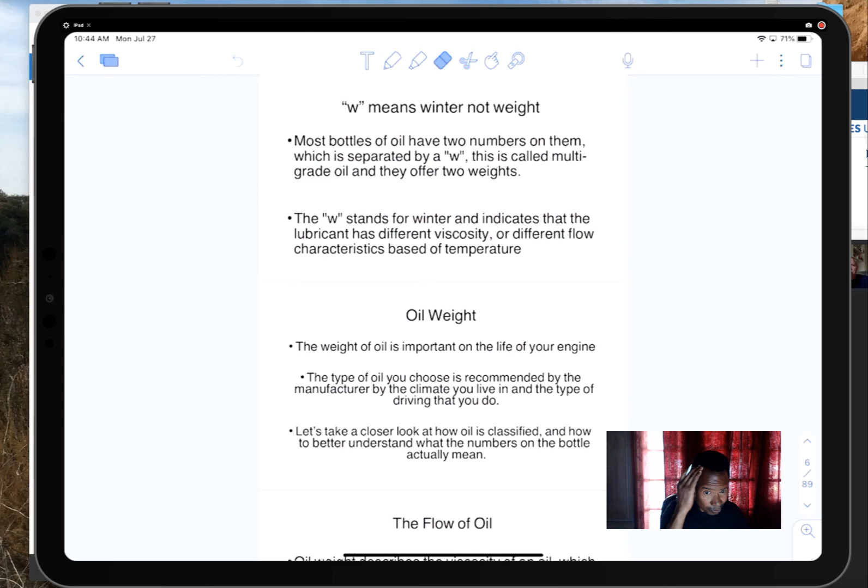All right, there we go. Okay, we talked about last week about the oil change and what's on the bottle. That is very important to know if you're going to buy your oil. Shit. Hold on. Wait a minute, minimize this.

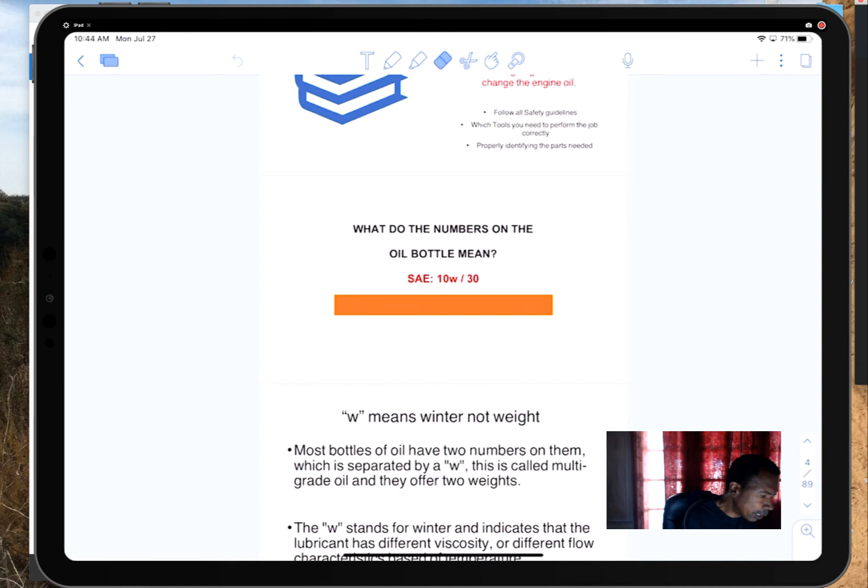Okay, and what we're talking about is this here, this number here. What does that mean? Just share the screen. Oh, I'm not sharing the screen. Yeah, share screen. Damn.

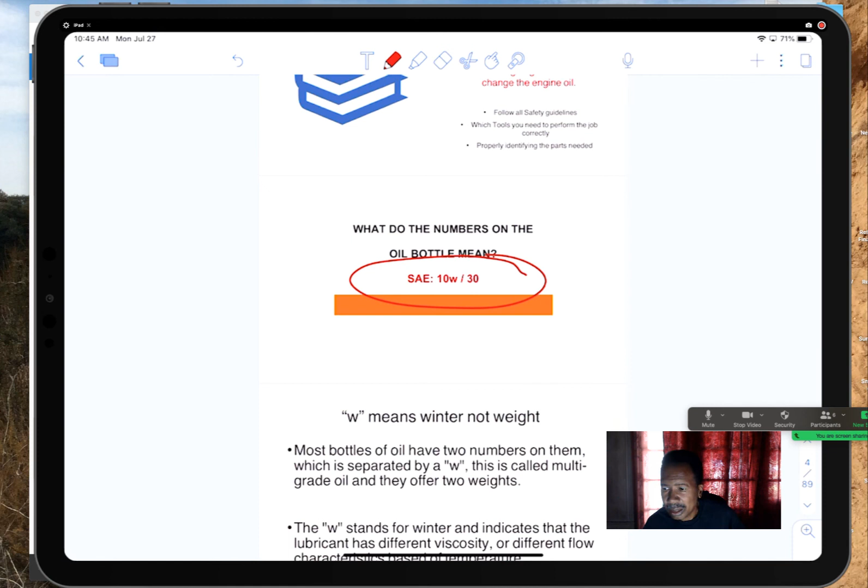All right, again, what I was talking about is when you go buy oil, you see the numbers on the bottle, like SAE 10W30. I used to think that W meant weight, but somebody said last week it means winter. This 10 and this 30 is the flow of the oil, or the thickness of the oil. A 10 weight oil is much thinner than a 30 weight oil, and a 5 weight oil is much thinner than a 10 weight oil.

So that's why it's important to look at that, because the wrong oil can damage the car. I've seen this once when people put the wrong oil in the car, and the next morning the car wouldn't start. They towed it to another shop and figured out somebody put the wrong oil in. The reason is the oil has to flow, and when it's cold it has to be a thinner oil to flow faster. This right here is at operating temperature.

Do you ever buy winter oil in Southern California, Mr. Davis? What's winter oil? Well, it's W, so that's for... No, this is for winter. The W means winter. On this, all oil says this. As far as I know, no matter where you buy it from, summer, winter, fall, California, Texas, Philadelphia, they all say the same thing. They might have an oil that's branded saying 'winter' on the bottle, but the W means winter.

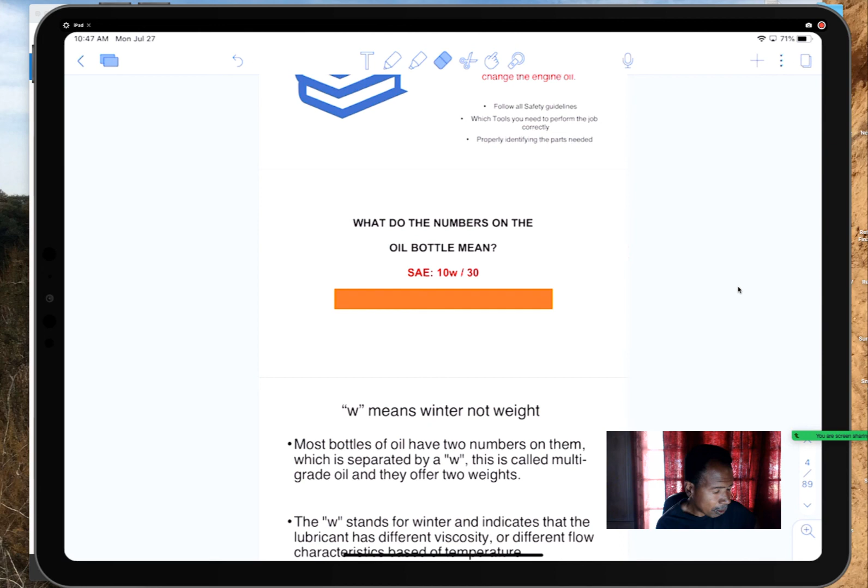In colder weather, the weight's going to be 10, but in normal weather, the weight's 30. Exactly, exactly. And the reason why is because the metal hasn't heated up yet, so you want the oil to flow faster, so you need a thinner oil. But a thin oil on a car at normal operating temperature might be a problem. And too thick of an oil on a cold car can cause an engine knock, engine damage. So the W means winter, not weight. For a long time, I thought it meant weight.

Yes, Mr. Davis, what does it mean when it's synthetic? What's the difference? That's a very good question, that's a really good question. Because oil is just made from, I don't know, I'm gonna say dinosaur bones.

Fossils. Synthetic oil is actually made for cars, believe it or not. Like my Prius and my Sequoia, I use synthetic oil. That's actually made for cars. It's a better way that it flows, a better way it treats the metal. It's actually really made for cars. The other oil, petroleum oil, is just oil. It helps, it's a lubricant in there, but synthetic oil is actually made for cars. It better treats the metal, and it lasts a little longer.

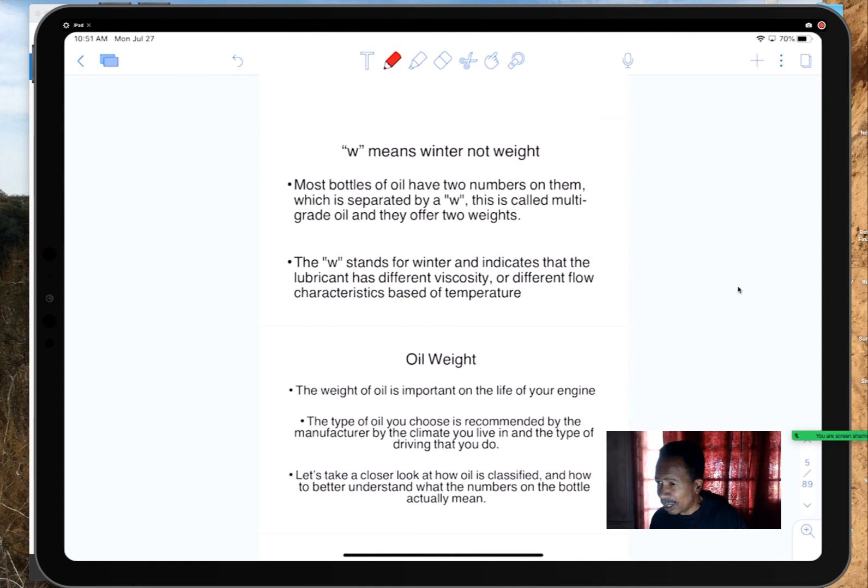Synthetic oil, in theory, as far as I know, was made to treat the metal in cars, expanding, contracting, a lot of mileage on the car, wear and tear. It was made just for that. Okay, does that make any sense? Yeah.

But most newer cars use synthetic oil, right? Like hybrids, they use a lot of it. Some of them use synthetic oil, but always get the oil recommended for that manufacturer. That number is what they recommend for that car. That number and type is made for that car, especially on newer cars. Not saying you can't get aftermarket oil.

Instead of getting Toyota oil, there are aftermarket name brand oils that still work. I can't even think of the names of them. Oh, like Valvoline and the one for... man, I can't even think of the names right now. Like name brand oils. Valvoline, that's one. And what's the name of the other one? Mobil, Valvoline, and...

Pennzoil, thank you. Thank you so much. I couldn't think of the name of that. Pennzoil, there you go.

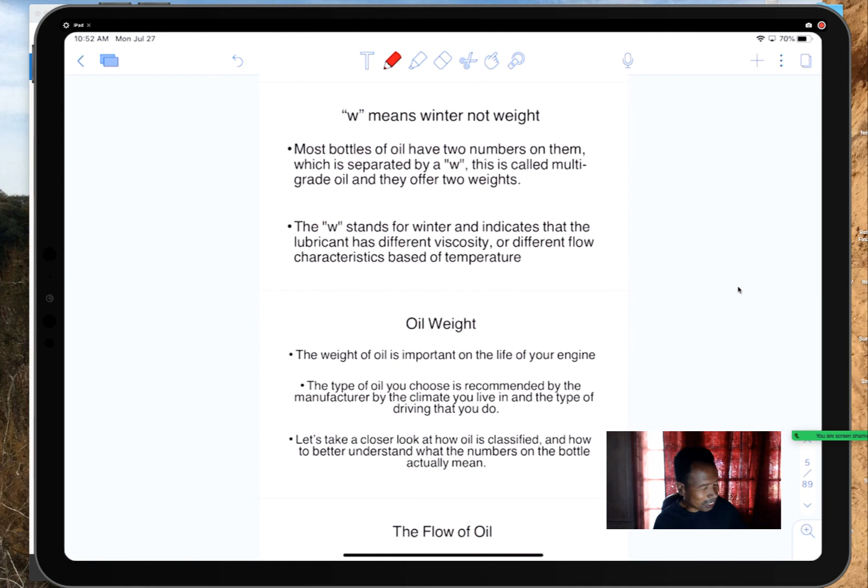But those oils are name brand oils, right? Anything that says SAE or API on it is approved by the Society of Automotive Engineers and American Petroleum Institute. It's supposed to be a decent oil. But if the car says use synthetic, you should use synthetic. I wouldn't go beyond that, if it says use synthetic, I would still stay with synthetic.

And it could be synthetic aftermarket too, it could be Pennzoil, Valvoline, synthetic oil for that car. It doesn't always have to be from the dealership. But if you don't get it from the dealership on a newer car, make sure it's approved oil.

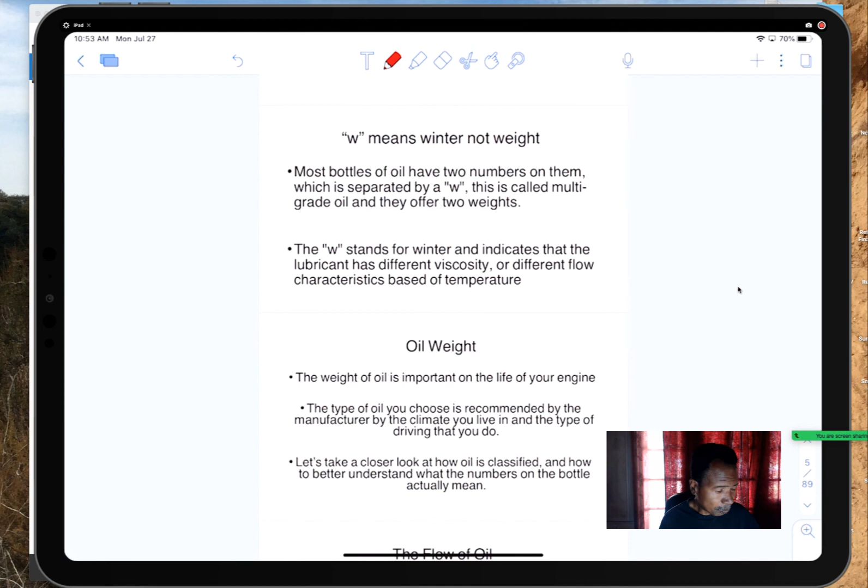Especially if you've got a new car under warranty, that's how they get you too. Say this just happened to one of the body teacher's cars, brand new car. The first year he had it, it started knocking. We literally couldn't believe it was knocking, we thought it was a belt or a pulley. It was the engine knocking.

You know what knocking means, like a little hammer noise. So he had to take it back to the dealership, and he'd been doing his own oil changes. So we got a little nervous there because now he had to go find all his receipts to make sure he used the right oil. Because the first thing they're going to ask is who did the oil change, and did you use the right oil. If they find out you used the wrong oil, your warranty is void.

So even though you use aftermarket oil on a newer car, make sure you keep the receipts, because they'll find any way they can to get out of warranty. So they had to take the engine apart, fix the part, I think it was a cam lobe or something, a valve, I forgot what it was, and put it back under warranty. That means the tech actually worked for half the price.

But if they found out you put the wrong oil in the car causing that knocking noise, that can void your warranty. So on a newer car, make sure you use the approved oil. On a lot of older cars, just use good oil because there's no warranty anyway, it's your car, just make sure you use good oil on it.

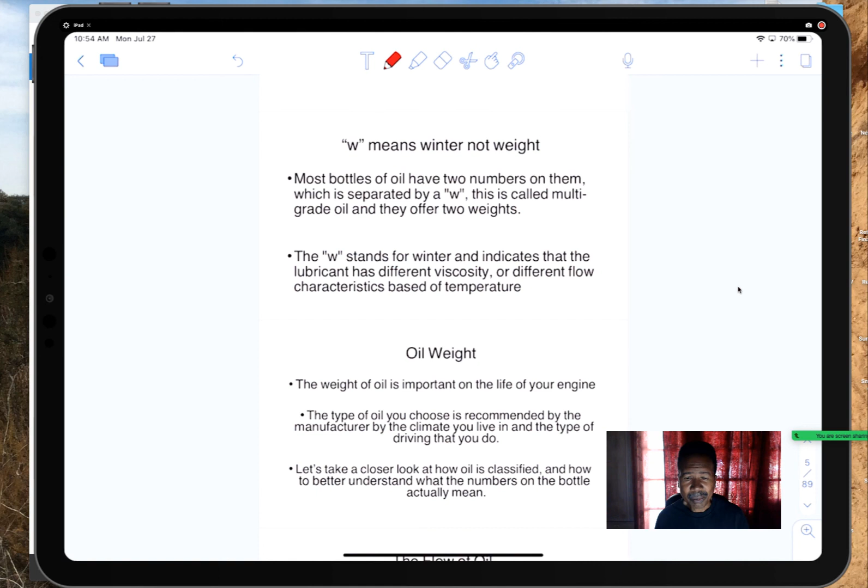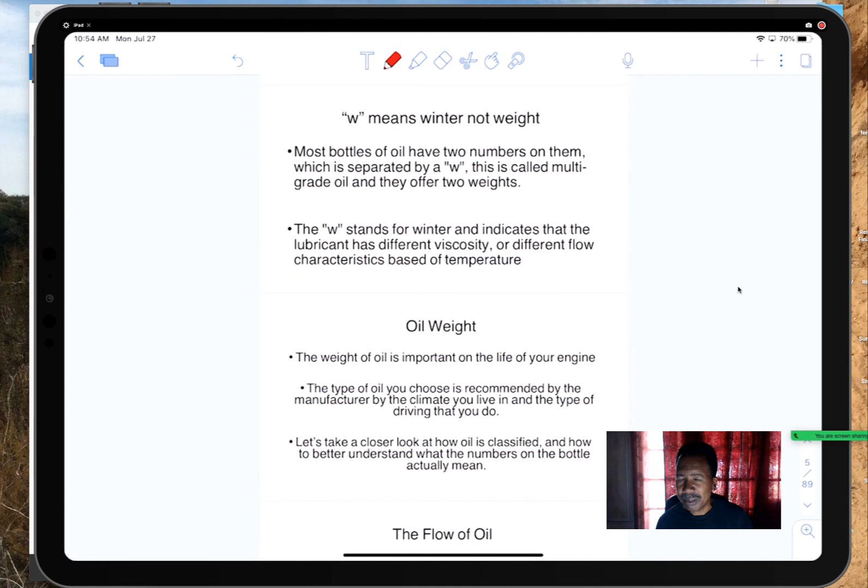So now going back to this. Most bottles of oil have two numbers on them, separated by a W. This is called a multi-grade oil, and they offer two weights.

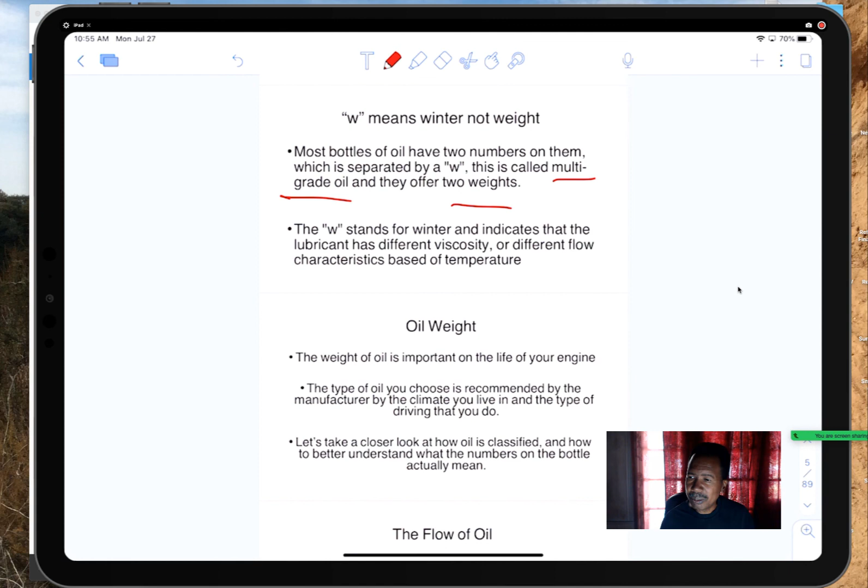The W stands for winter and indicates that the lubricant has different viscosity, which basically means flow characteristics based on temperature. And that's what you want. You never want to use a straight weight oil like 30 weight, where that's all it says is 30 weight. You don't want to do that.

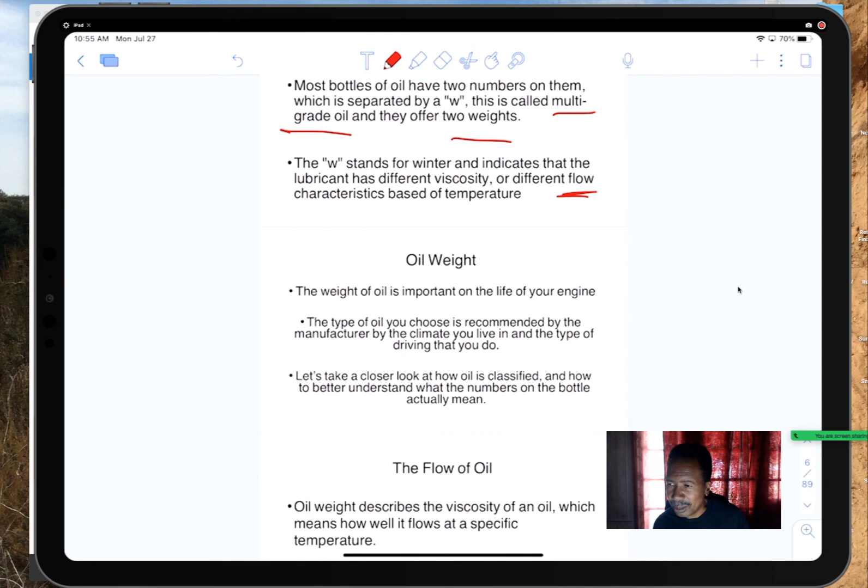Oil weight. The weight of the oil is important to the life of your engine. The type of oil you choose is recommended by the manufacturer based on climate, where you live, and the type of driving you do.

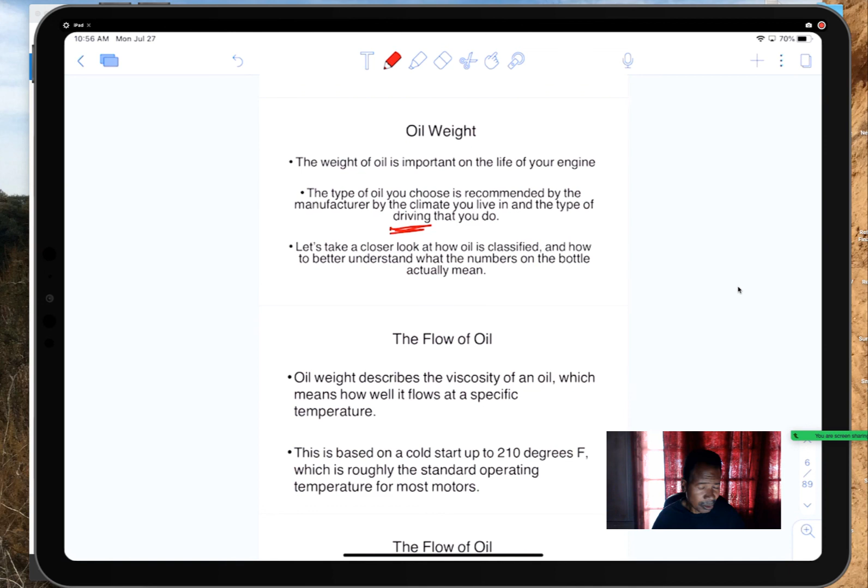So let's take a closer look at how the oil is classified and how to better understand what the numbers on the bottle actually mean, which I just told you.

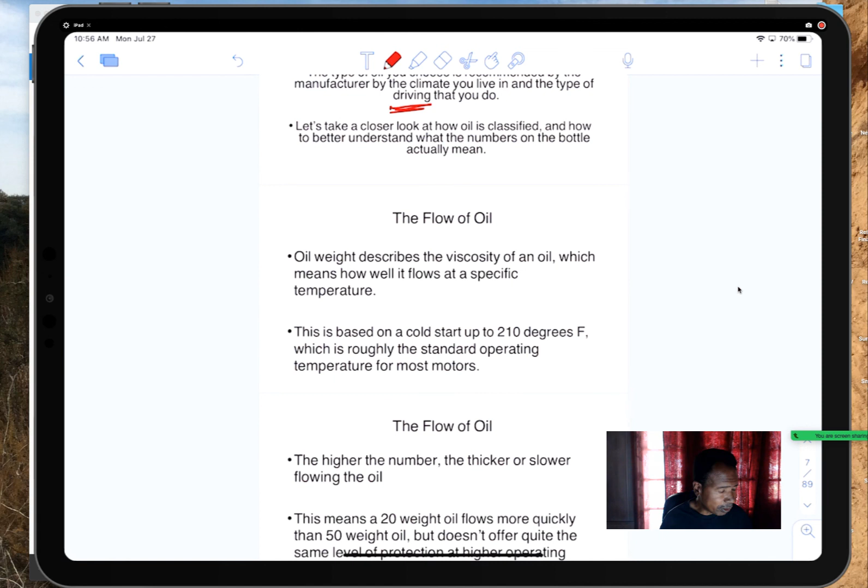Oil weight describes the viscosity of an oil, which means how well it flows at a specific temperature. This is based on a cold startup to 210 degrees Fahrenheit. So they're going from a cold start, when you start your car in the morning, to operating temperature. Most cars operate at 198 to 210 degrees Fahrenheit, which is roughly the standard operating temperature of most motors.

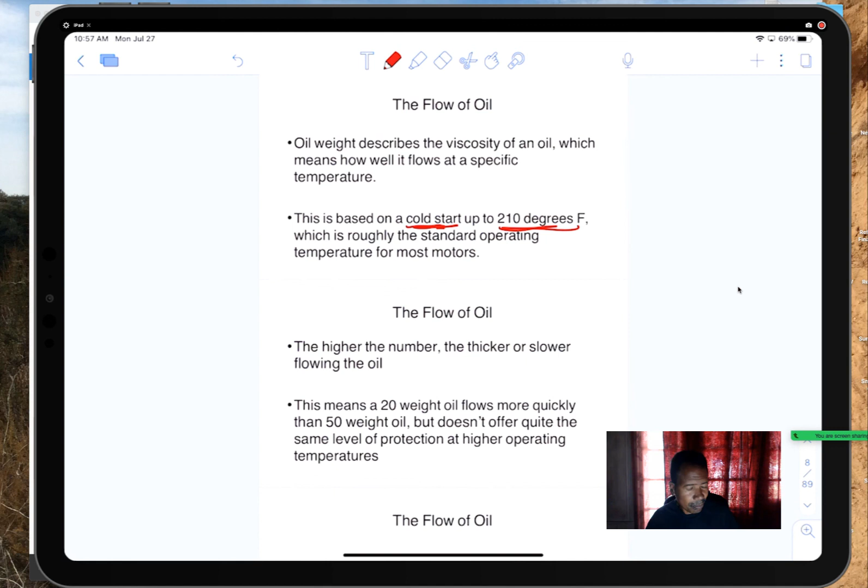The flow of oil - the higher the number, the thicker, and this is the key right here - the slower flowing the oil.

Now imagine this, I'm trying to put this in perspective for you. Your car at night, you went home, you parked your car. It sat there for 16 hours to the next morning till you got in it again. All the oil now has drained from the engine and is in the pan.

Correct, right? So now you start your car up, the engine is basically dry. That's where this synthetic oil comes into play - it treats the metal, right? But it's basically dry, so when you start it up, that oil has to flow from that pump we showed you before, from the oil pan. The pump has to push that oil through that engine quickly, so the engine won't start knocking or seize up.

Also, a lot of cars use the oil to push up the pressurized lifters to open up the valves. Remember that car I told you earlier that wouldn't start because they put the wrong oil in it, because it was too thick? It couldn't open up the valve to get the car started in the morning, because the lifters need oil to open up the valves.

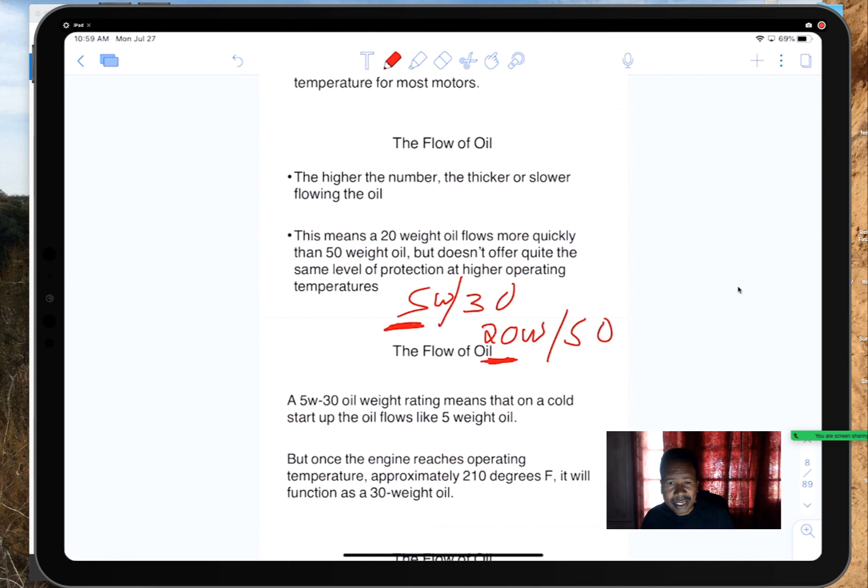But anyway, imagine that you got a car that requires 5 weight oil - it requires 5 weight, right? And you put 20 weight in there, right? And say it calls for a 5W30, and you put in the car 20W50. In the morning time, it's this number here. Now remember what it just says: the higher the number, the thicker or slower moving that oil is. So you got a car that requires 5 weight oil, and you got a 20 weight oil in it. It's going to move much slower, 4 times slower than the required oil.

And guess what? Now your car starts to knock or wear out faster. Does that make sense? Do y'all get that, understand that? Yeah, so that's why it's necessary to use the correct oil, especially in the morning time.

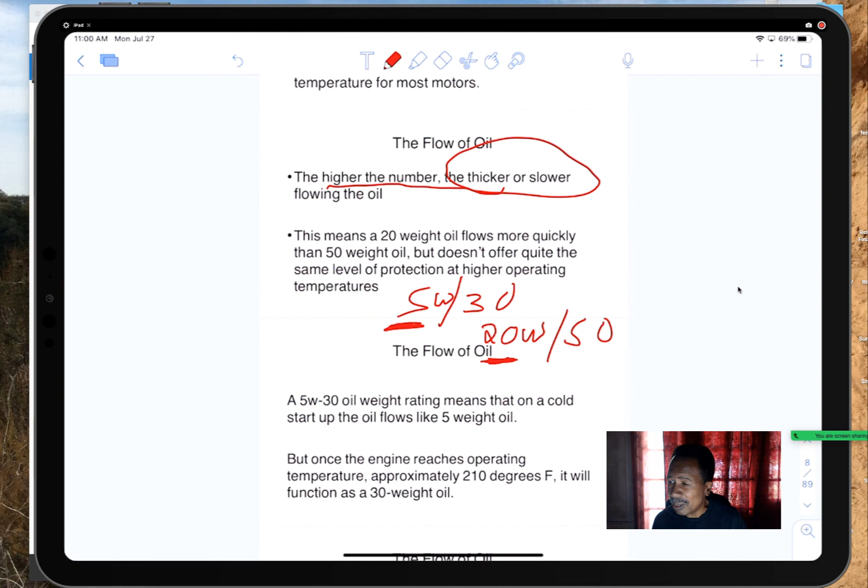So in the morning, this car is at a 5 weight, but you got 20 weight oil in there. That means the 20 weight oil moves more quickly than 50 weight oil, but doesn't offer quite the same level of protection at higher operating temperatures. Now that's the other way around - that's the other package.

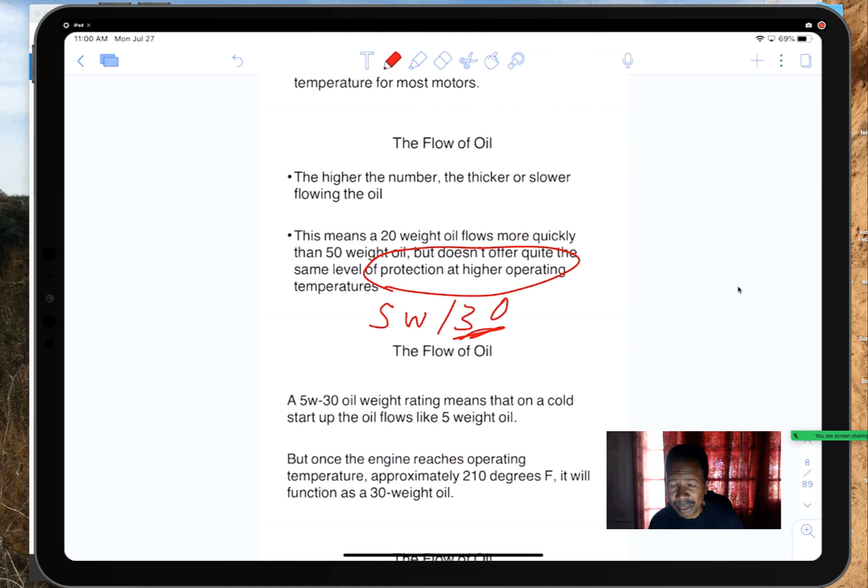See now, this weight here - this is for a hot car, when it's at hot operating temperature. If you put a 5 weight, let's say you could put a straight 5 weight oil in there, okay, and it requires 30 when it's hot - when it's hot, obviously it's flowing, but it's not offering the same protection. The 30 weight is a thicker oil, whereas the 5 weight is a thinner oil.

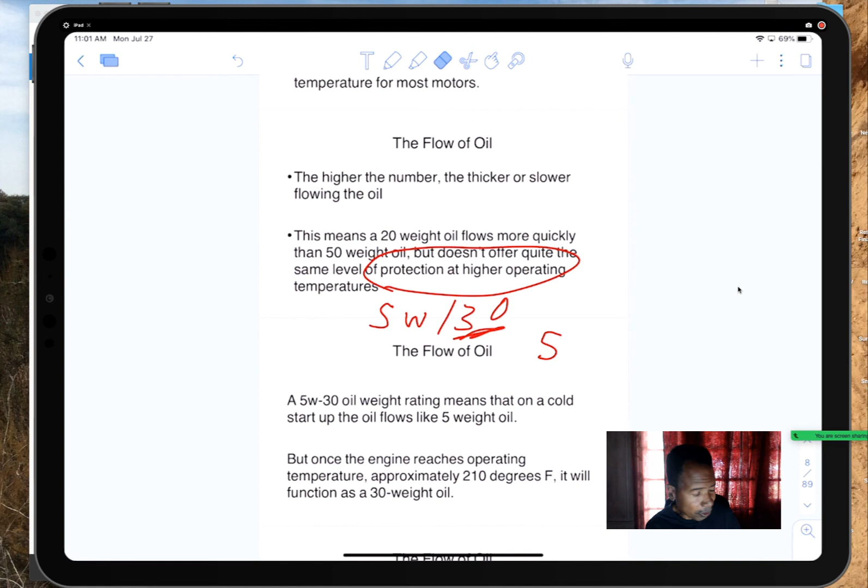Okay, now how can I do that? This is like my Honda. It has almost 300,000 miles on it. When I first got that car, it was a 10W30 oil. That was new. Now I put 20W50 oil in it. That's just opposite of what I just told you. And the reason I do that is because for wear and tear, the car is not as tight as it was before. It's a little worn down, right?

So for protection of the metal, I put a thicker oil on it, because now it's not as tight or new as I first got it. It's got almost 300,000 miles on it. It's a little worn out. So that means the parts are worn out. So I put a thicker oil in it.

And sometimes when you put too thin of oil in a car, you'll see blue smoke out the tailpipe when it's too thin also. So that's why it's recommended to put the right oil in the car. But sometimes, like I just said, you might have to go up based on how you drive, the age of the car, how many miles are on the car.

Now, don't get me wrong. I have on my Honda, the older one, I still put - when I first got it, it was 10W30. And sometimes, if it's on sale, I put 10W40 on it. It runs just as fine. I usually get what's on sale.

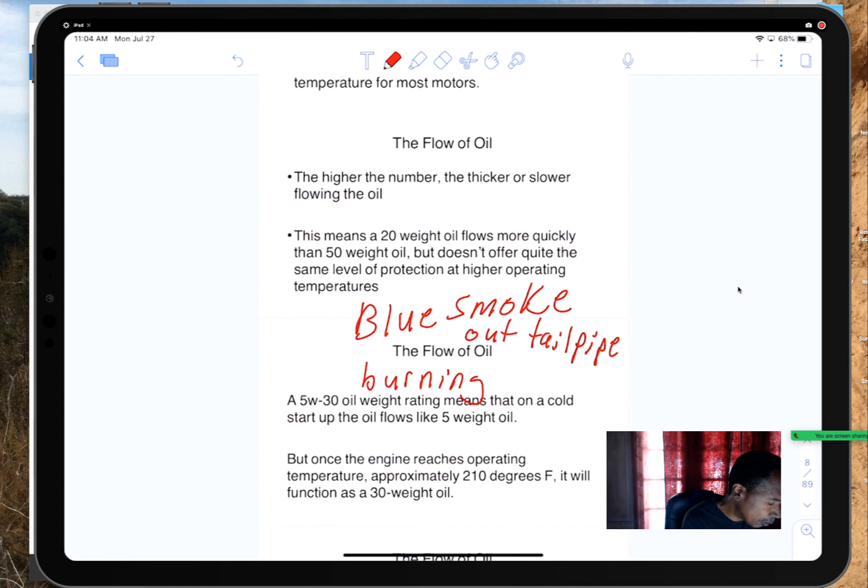Blue smoke out the tailpipe means your car is burning oil. Sometimes if you're lucky, you just got too thin of oil in there - you might can go up a little bit, help stop it. But most of the time it's the engine's worn out. You got worn seals, worn rings, piston rings, or worn valve seals, especially if you see it in the morning time. You see blue smoke in the morning and it goes away when it gets to operating temperature - usually your valve seals are worn out, and the oil is going right past the rings, right past the seals.

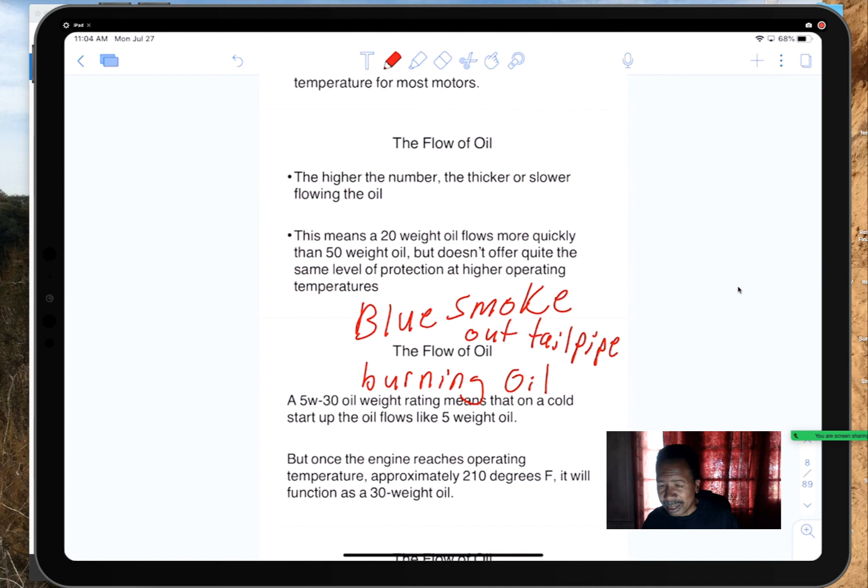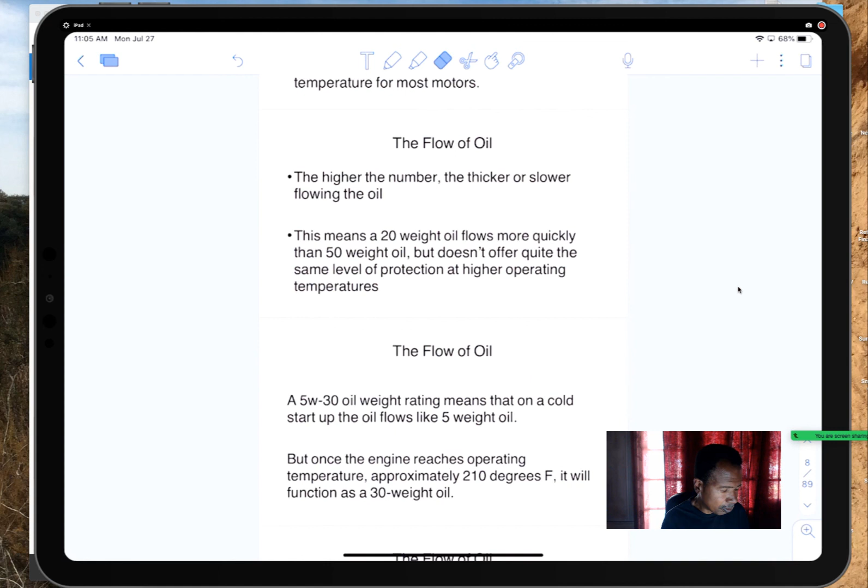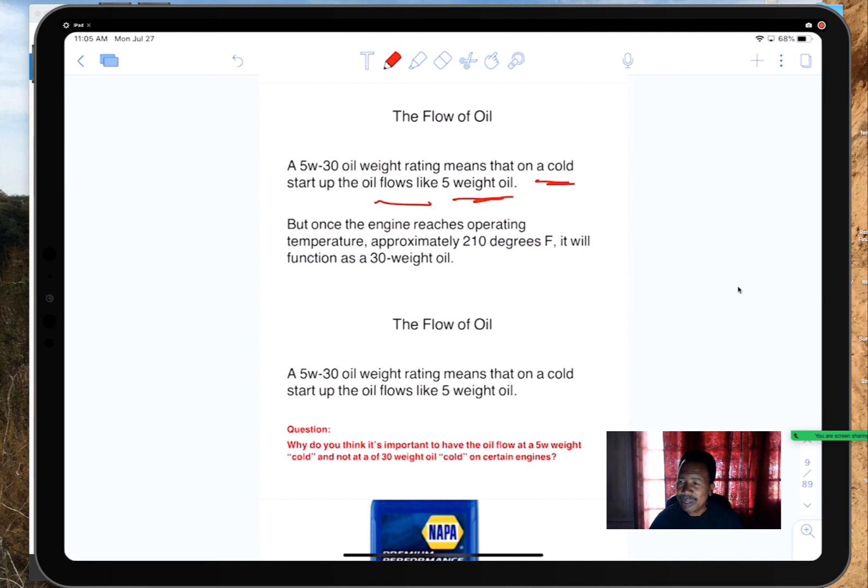So a 5W30 oil weight rating means that on a cold startup, the oil flows like a 5 weight oil. Again, on a cold start, it flows like a 5 weight oil. Once the engine reaches operating temperature - that's usually around 198 to 210 degrees - it will operate as a 30 weight oil. And again, that's why you want a multi-grade oil.

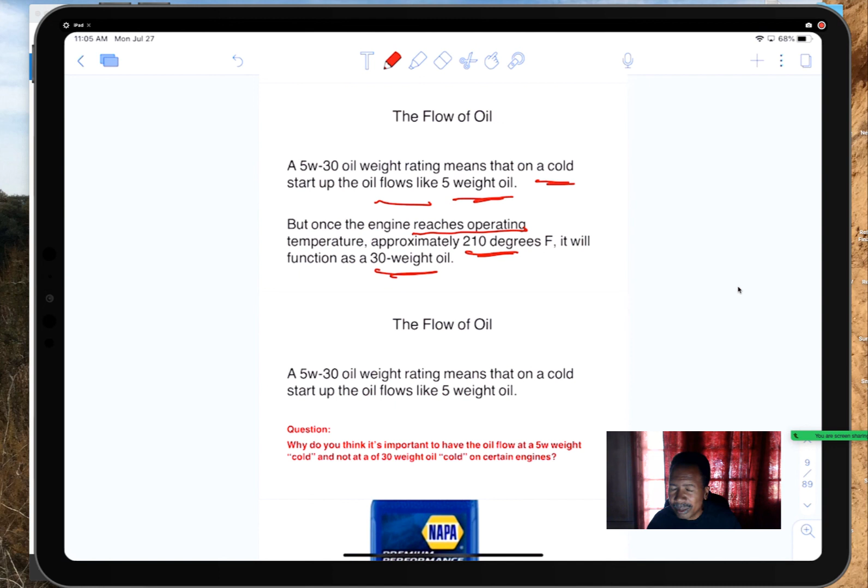The flow of oil - a 5W30 oil weight rating means that on a cold startup, the oil flows like a 5 weight oil. Question: why do you think it's important to have the oil flow at a 5 weight cold and not a 30 weight oil cold on certain engines? That's a question for y'all - Angel, Orville, or Anthony. Why do you think it's important to have a 5 weight oil rated for that, rather than a 30 weight oil, when it's cold?

It probably keeps the engine warmer. Well, that's right, it keeps it - it's based off the temperature. Anything else? Angel or Anthony? Anybody else? Listen to what I'm saying. Why is it important to have a 5 weight oil? Remember, 5W oil - I keep saying weight - the 5W oil, the weight of it's 5. Viscosity. Why is it recommended to have a 5W oil cold and not a 30 weight oil cold when it requires the 5 weight oil?

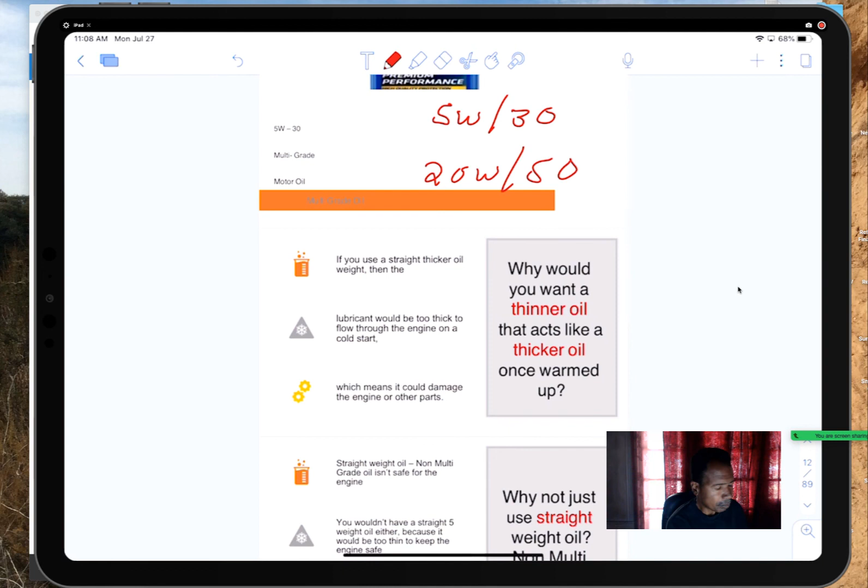Remember, this is cold. This is hot. Right? The 5 is a thinner oil. That means it can move faster through the passages, between parts, much faster than a thicker oil. Let's say this is my clearance right here. Obviously, a thinner component can actually move through that much easier, right? You can see that it can move that much easier. But if I try to do the same thing with something thicker, like my tin here, it's gonna go through, but it's gonna go through much harder. It gets there, but I'm pressing on this thing too - it's gonna get much harder. You see the difference?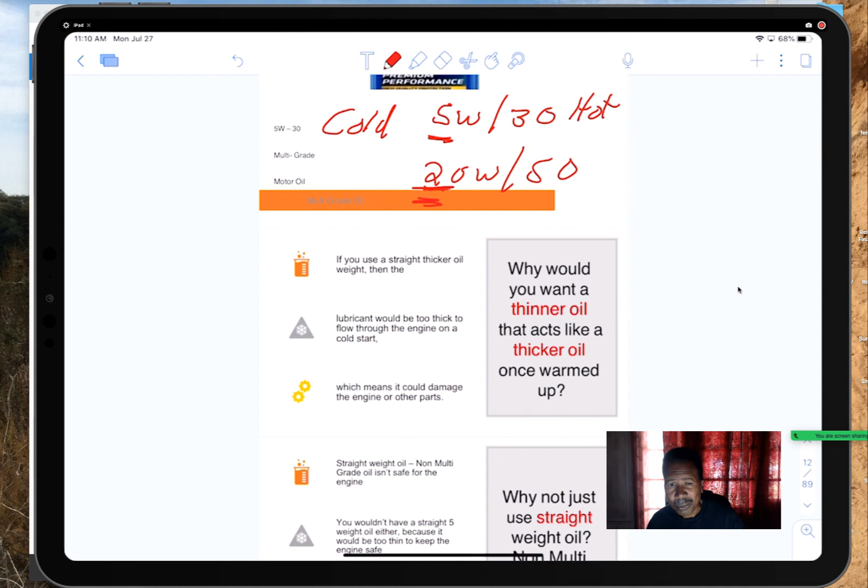Basically, I'm just trying to show how the oil works. So if I got a thin oil, it'll go right through. So that's trying to give you a visual of what I mean by 5 and 20. A 5-weight oil is much thinner than a 20-weight oil.

Mr. David, I have a question. Maybe you explained it already, but I see many oil companies who make 0W20, oh yeah, 0W30, 0W50. What does zero mean? Thinner than 5.

Really? Yeah. There's some hybrids that take 0W/something, right? I forgot what it was, but I seen a hybrid, it was 0W/20 or something like that. I mean, that's about the thinnest you can get. I seen a hybrid take that one time. Matter of fact, I thought my hybrid took that, but it doesn't - it takes 5, right? But yeah, it means it's just a really, really fine oil.

Yeah, but I wouldn't put that 0-weight oil on my Sequoia, on my Prelude, on my daughter's car. Probably smoke like crazy. Right? I probably see blue smoke come out the tailpipe. For a hybrid, especially for a hybrid, right? On a hybrid, use the oil it's called for.

I don't care how many miles on it, you don't change the oil to a different weight until you start having problems with it. Okay? If it's a hybrid, you use the oil that car calls for. But yeah, some hybrids take a 0. I don't know if any other car takes a 0, but I know I've seen on hybrid vehicles a 0 weight. Yeah, so you wasn't seeing things. Yeah, some cars do a 010 or 0. What's it? 020? It's a 0 something. I forgot what it was.

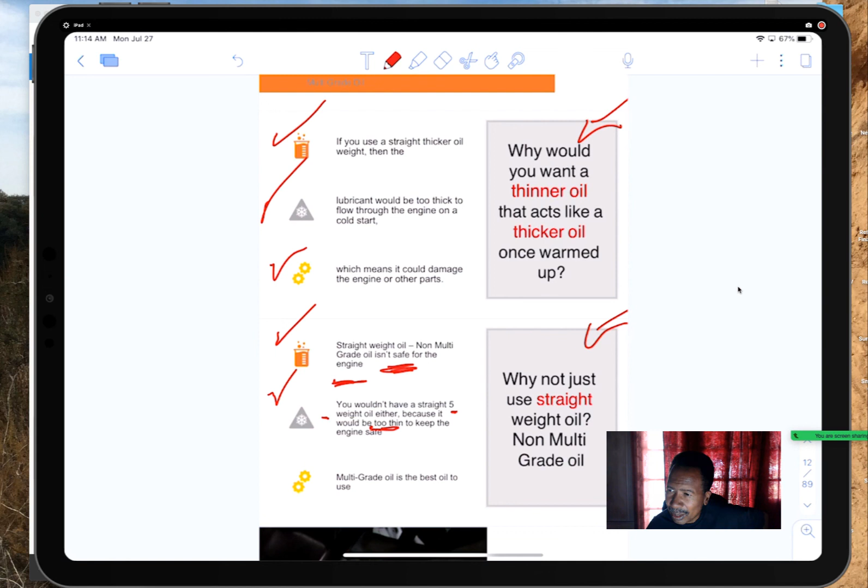Multigrade oil is the best oil to use. That's the best oil you can use for your car. This is the last one. Use the correct oil that protects your engine. That's number one. You always do that first.

Now, this you got to use your imagination. This is the last one, and I'll let you go. Describe 3 things you see happening in this picture. And here's a hint: you may not see with your eyes all 3 things.

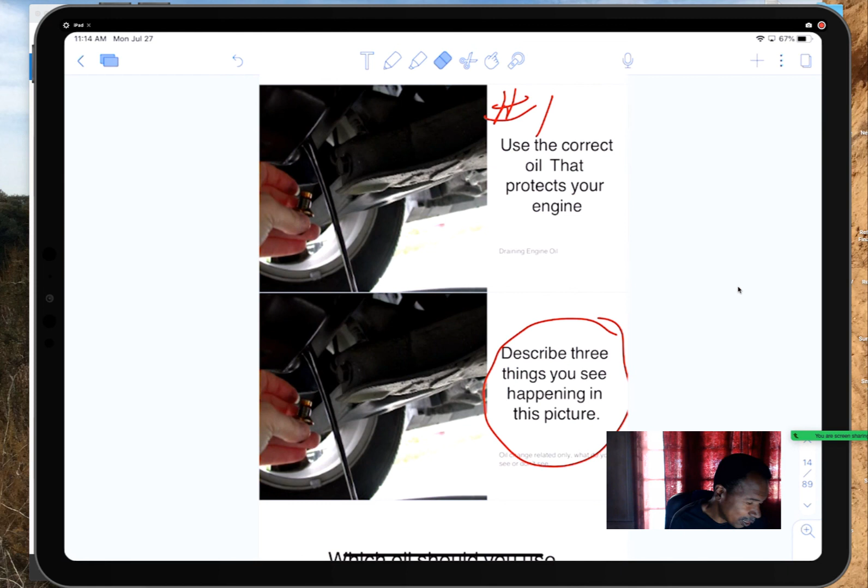Three people may see three things, and all three of y'all might see three different things on this car. Now let's do this, all y'all give me 3 things. I don't care if it's the same thing or not. You might say something different, and it'll probably be right.

Angel, what you see? Give me 3 things. Well, the oil is old looking. They're never changing it. That's good, I don't see any safety in there. I think that's all I see now.

Cool, you got one more. All right, that was good. Orfeo, give me what you see. I see, similar to what Angel said, the oil is very dark. I see they're taking out the thing from the bottom, going into a pan maybe. Exactly, see, that's good.

Anthony, what you see? It's hard on Anthony because he's the last one, everybody named everything. What is he holding in his hand? There you go. Anthony, what you see? What's that gun? Sorry teacher, I didn't see anything. Oh, you can't see anything? Oh, you can see it. Can you see that picture?

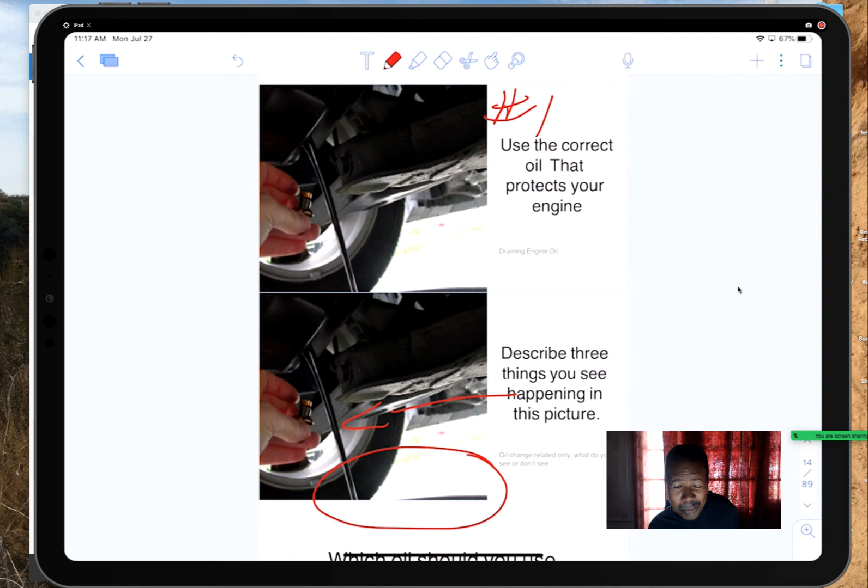I didn't see that the oil is dirty, I didn't look at that. You're right, the oil's dirty, it looks so dirty. Other thing I see, somebody mentioned it, it's going into an oil pan down there. It's draining somewhere, right? There had to be a pan down there somewhere, so it's going into the other thing.

Guess what? To me, that car is lifted up in the air. He's not laying on his back, it's up, he got on the hoist. He has it on the hoist, and that's the oil pan, right? That's your pan right here. That's really good because we all can look at the same picture and see something different. But basically, what he's doing is an oil change. All right, that's really good.